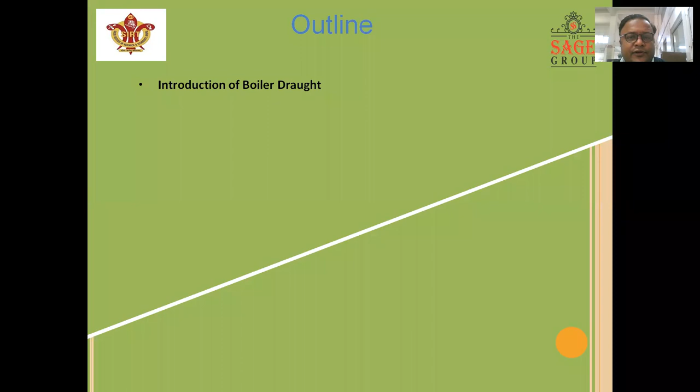Good afternoon, dear students. Today I will discuss the topic boiler draught and its types. Before going on to the main slide, I will discuss the outline. This is the introduction of boiler draught, draught classification, natural draught, artificial draught, forced draught, induced draught, balanced draught. This is the first slide of today's lecture.

What is the basic definition of the boiler draught? Draught may be defined as the small pressure difference between the pressure of the outside air and that of the gas within a furnace or the chimney at a given level, which causes flow of air or hot flue gases to take place through the boiler.

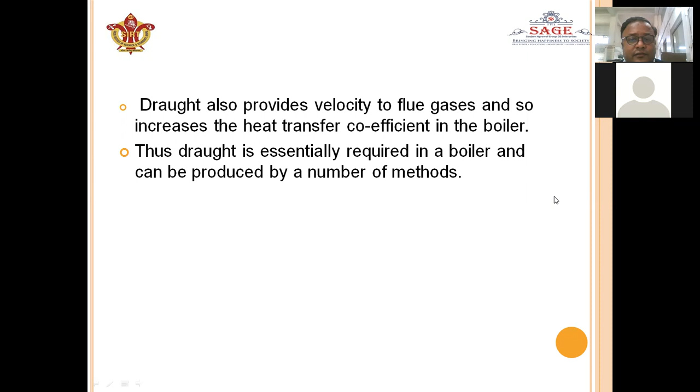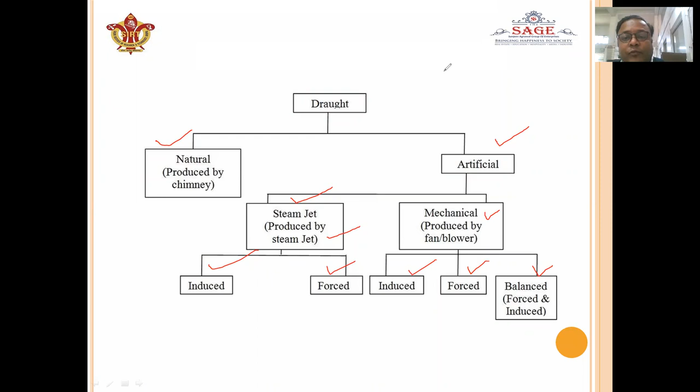Similarly here, if the balanced draught is used, that means the ID and the FD fan both are necessary for producing the draught for the boiler section. So this is the draught tree diagram.

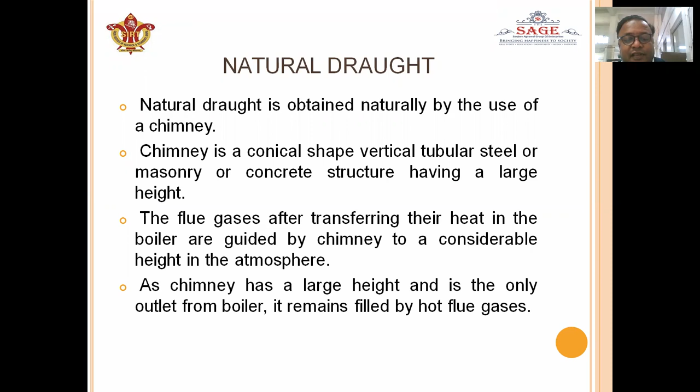The flue gases, after transferring their heat in the boiler, are guided by the chimney to a considerable height in the atmosphere. As the chimney has a large height and is the only outlet from the boiler, it remains filled by the hot flue gases. These gases, although they have given their heat to the water in the boiler, are still hotter than the boiler room air. And due to this, the exhaust gases are lighter in weight than the outside air.

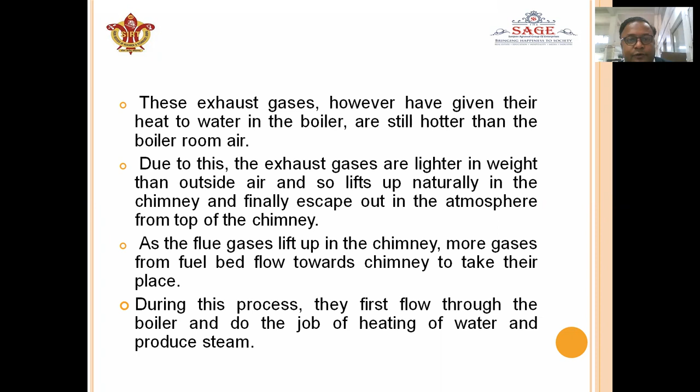As the flue gases flow through the boiler and then to the chimney, fresh air from the outside naturally enters the boiler.

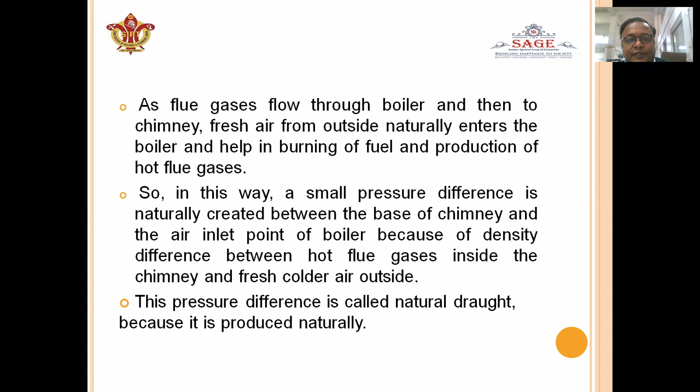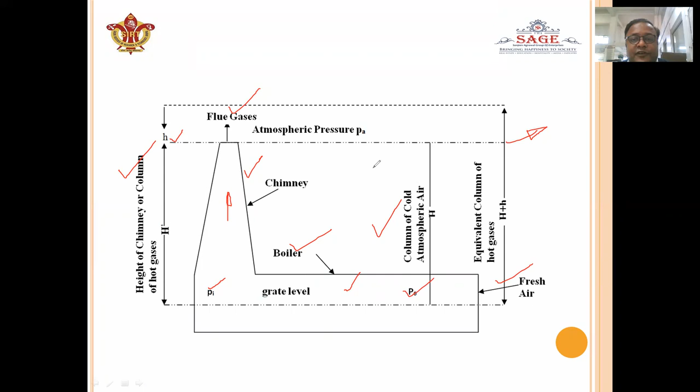The fresh air enters at the grate level surface for the efficient combustion of the fuel in the combustion chamber, and this is the pressure. It is the initial pressure. This is the outlet pressure, which is required for the pressure difference between the inside and the outside atmosphere. Inside, that is called the combustion chamber pressure, and the outside, that is the cold air pressure.

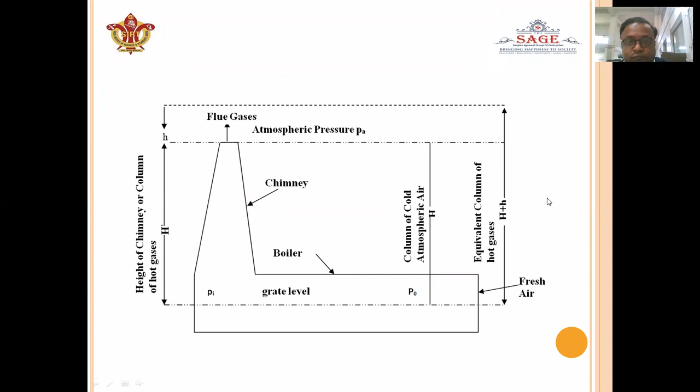Artificial draught: when the draught is produced by some external agency, that is a mechanical fan or blower, or by a steam jet, that is called the artificial draught.

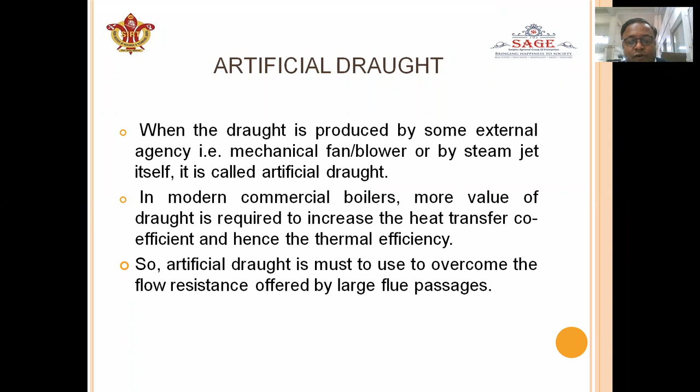And hence the thermal efficiency. So artificial draught must be used to overcome the flow resistance offered by the large flue passages. Forced draught, that is the positive pressure draught. A fan is installed at the base of the boiler before the grate, which forces the outside air through the fuel bed furnace and the air preheater, then the flue gases through the flue passages and the economizer.

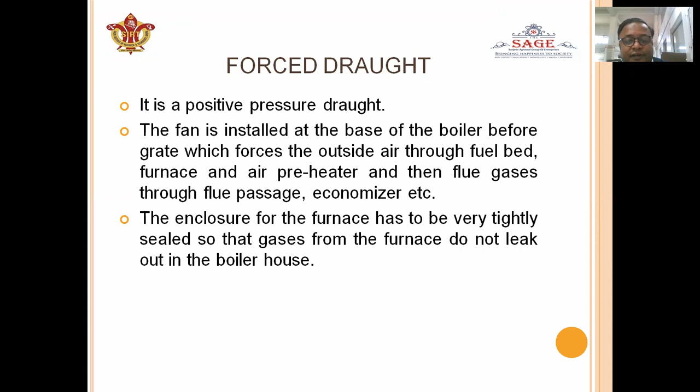Combustion of fuel should be proper. It requires the proper amount of oxygen. It will be provided by the forced draught fan. The enclosure for the furnace has to be very tightly sealed so that the gases from the furnace do not leak out in the boiler house.

Next is the induced draught.

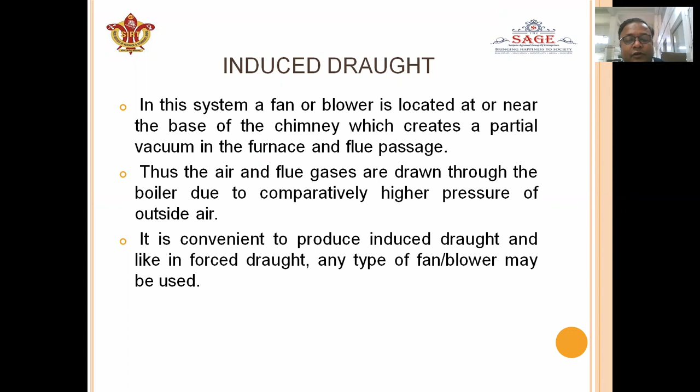It is convenient to produce induced draught, and like in the forced draught, any type of fan or blower may be used. Balanced draught is the combination of the forced and the induced draught. The forced draught fan overcomes the resistance in the air preheater and the grate, and the induced draught fan overcomes the draught losses through the boiler economizer and the connecting flue passages.

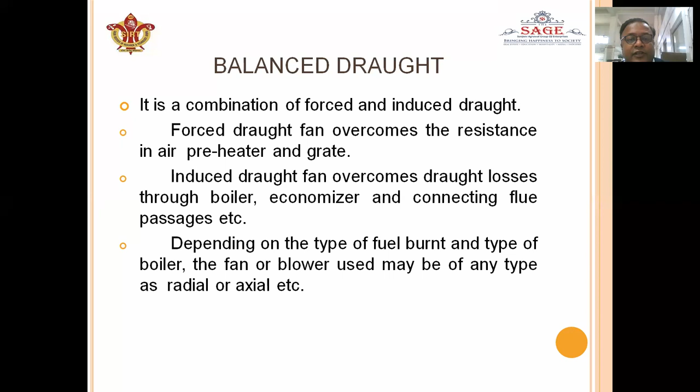So normally, as we said in the previous slide, the forced draught is placed below the boiler surface, but induced draught is placed at the bottom of the chimney. Depending on the type of fuel burnt and the type of boiler, the fan or blower used may be of any type, radial or axial. What are the advantages of the mechanical draught?

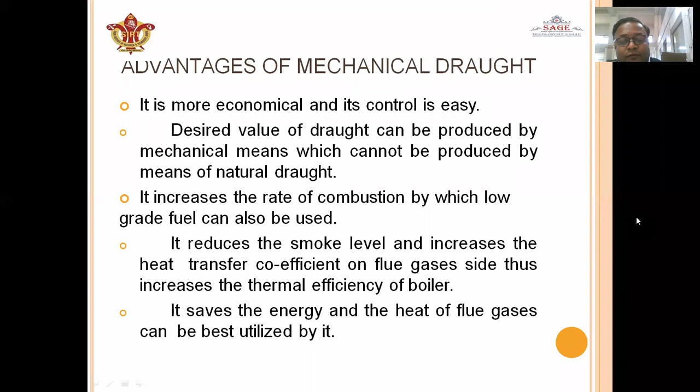Then it saves energy, and the heat of the flue gases can be best utilized by it. What are the disadvantages of the mechanical draught?

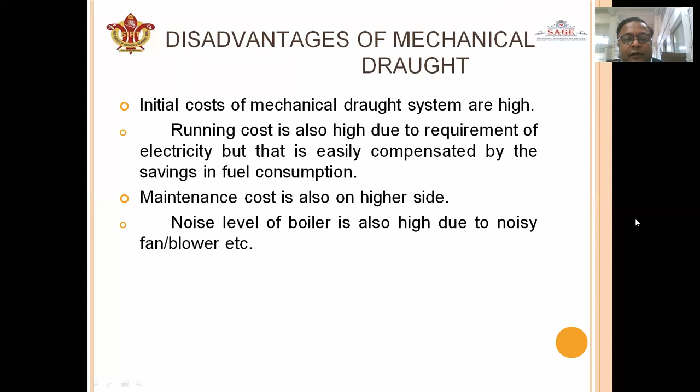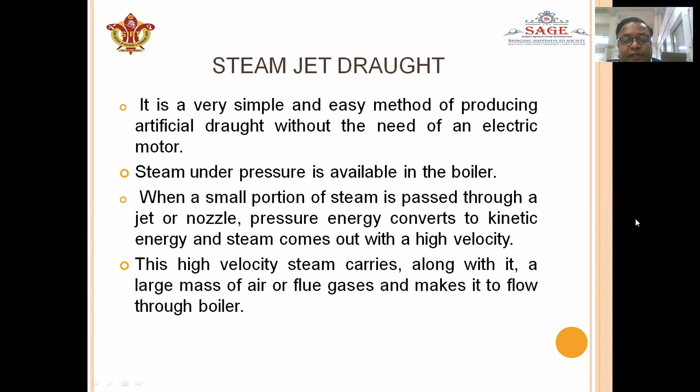Steam jet draught. This is another type of draught. It is a very simple and easy method of producing artificial draught without the need of an electric motor. Steam under pressure is available in the boiler; when a small portion of the steam is passed through the jet or nozzle, pressure energy is converted into kinetic energy, and the steam comes out with a high velocity. This high velocity steam carries along with it a large mass of air or flue gases and makes it flow through the boiler.

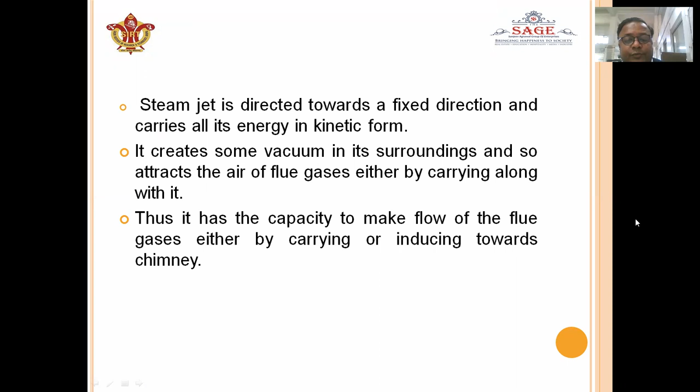A steam jet, directed towards a fixed direction, carries all its energy in kinetic form. It creates some vacuum in the surrounding and so attracts the air or flue gases along with it, carrying or inducing them towards the chimney.

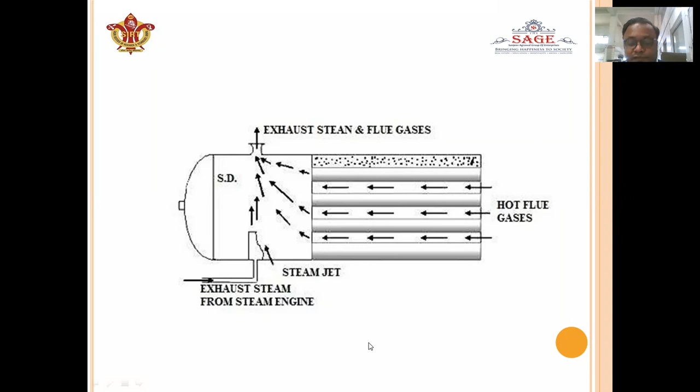In forced steam jet draught, steam from the boiler, after being throttled to a gauge pressure of 1.5 to 2 bar, is supplied to the jet or nozzle installed in the ash pit. The steam emerging out of the nozzle with great velocity drags air along the fuel bed, furnace, flue passages and then to the chimney.

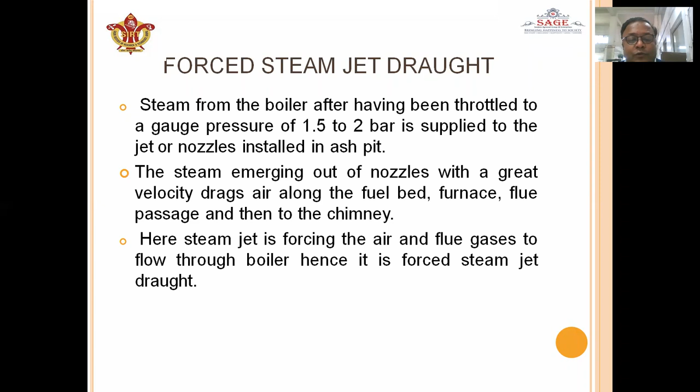The steam jet forces the air and flue gases to flow through the boiler, hence it is called forced steam jet draught. In induced steam jet draught, the jet of steam is diverted into the smoke box or chimney, where the kinetic head of the steam is high but the static head is low.

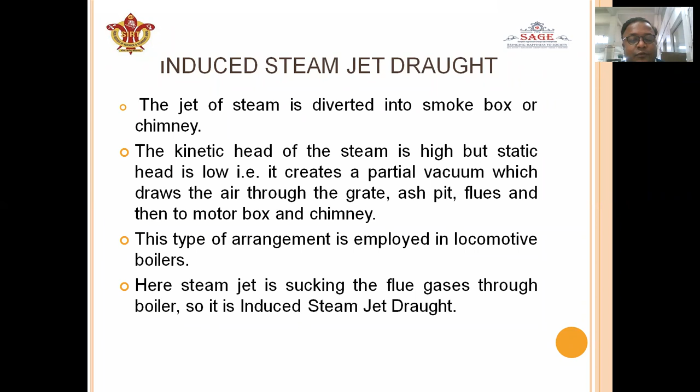It creates a partial vacuum which draws the air through the grate, ash pit, flue, and then to the smoke box and chimney. This type of arrangement is employed in locomotive boilers, where the steam jet sucks the flue gases through the boiler, so it is called induced steam jet draught.

What are the advantages of steam jet draught? The induced type of steam jet draught is quite simple and cheap, made in a very simple way, and affordable, available in the market.

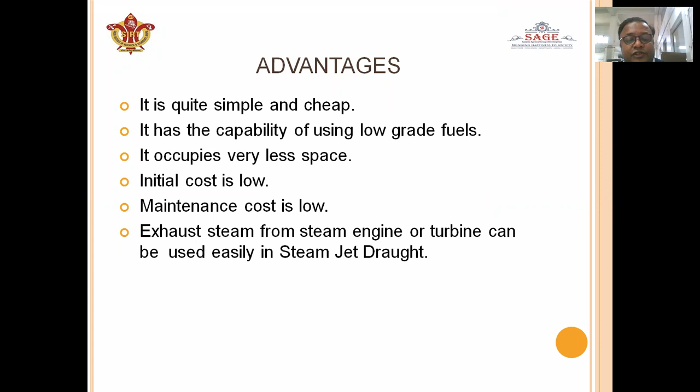Disadvantage: it can operate only when some steam is generated, and it produces a very low draught.

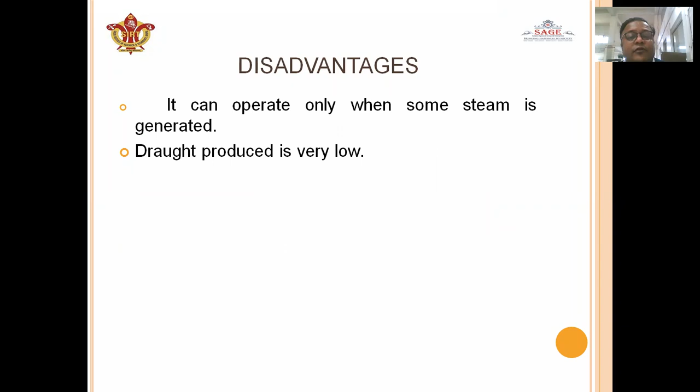What are draught losses? There is loss due to the frictional resistance offered by the flue gas passages to the flow of flue gases, and loss due to bends in the gas flow circuit which also offer flow resistance.

There is loss due to the friction head in the grate, economizer, and superheater, loss due to the flow resistance offered by the chimney, and loss due to imparting some velocity to flue gases, which is required to increase heat transfer in the boiler and to throw away the flue gases from the chimney. These are the draught losses.